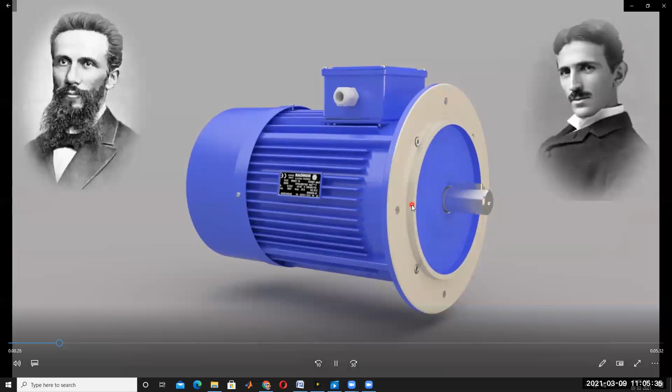So, induction motor. Generally, you can say that this is an induction motor. In this induction motor there are different types of parts. The induction motor concept was developed by Nikola Tesla and Galileo Ferraris. These are the different concepts we are getting from these two scientists.

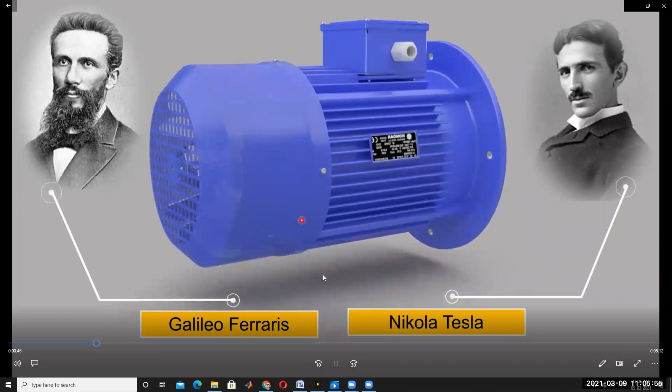Induction motor concepts, the working principle, were invented by the scientists Nikola Tesla and Galileo Ferraris. Because of this invention, nowadays we are enjoying these motors: single phase induction motors, fans, escalators and paper industries. Different types of applications are there.

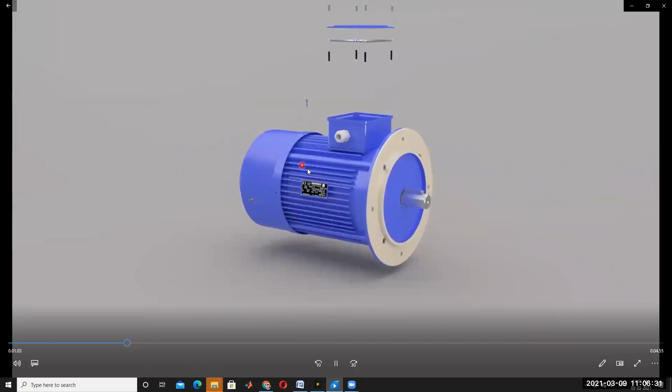This induction motor has different types of parts. This is called a terminal box. Six terminals are coming from this box. The outside is called the stator frame, the frame of the induction motor. The terminal box is placed on the stator frame of this induction motor, and this is called the cooling fan.

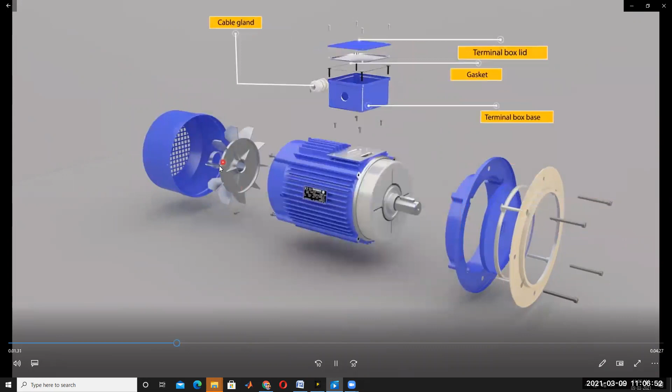So what is the purpose of this fan? It's used to cool this motor. When the motor is operating for a long time, the current increases, and compulsorily some losses are there. Those losses are dissipated in the form of heat, and that can be cooled by using the cooling fan.

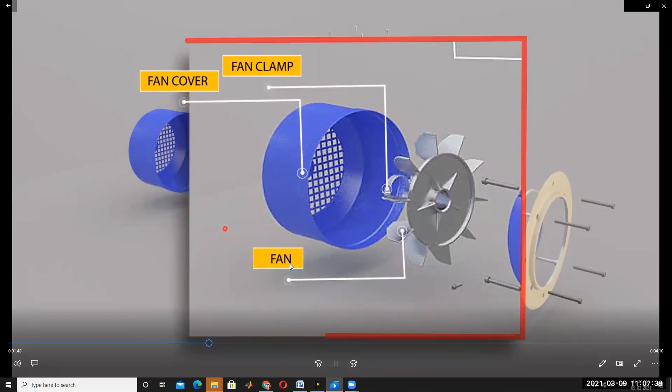And this is called the fan cover and fan clamp. This is the fan. It is placed on one side of the induction motor, used for cooling the induction motor. This is also one of the important equipment in the induction motor. And this is called the flange.

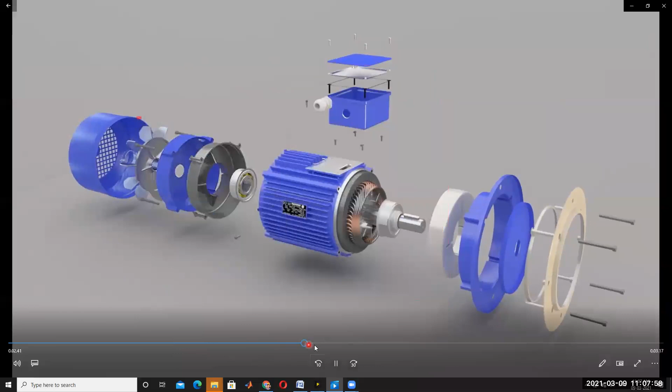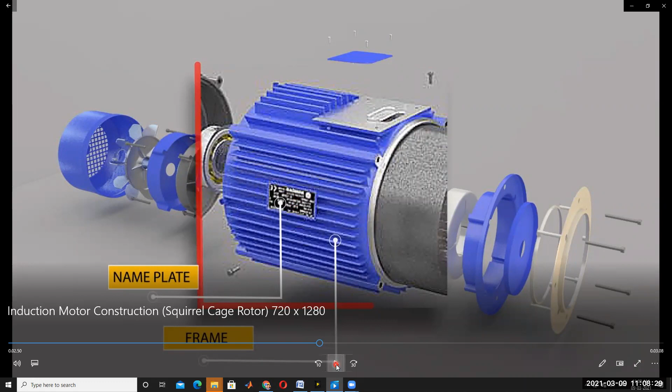This is the nameplate of the induction motor, and this is called the frame. In the nameplate, each and every information is provided about this machine: the operating voltage, the current range, the voltage range, and the operating frequency. Everything is provided in the nameplate of this induction motor.

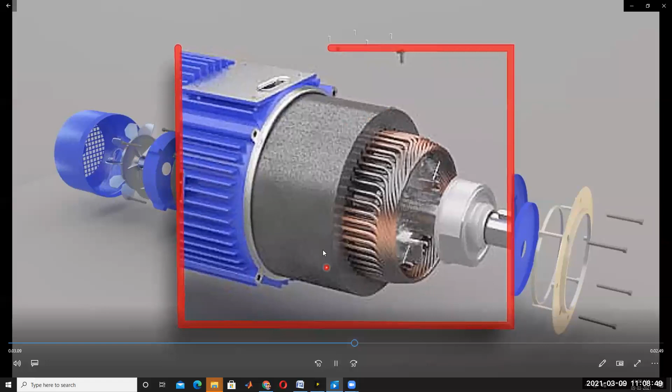This is called the stator core of the induction motor. In this stator core, the winding is placed inside the slots. There are different slots, and inside the slots the winding is placed and distributed. So this is the outer frame and the stator core. I have already explained this concept, the stator core design.

In this stator core there are different slots. In each slot, the winding is placed, inside the slots of the induction motor. Here is the slot. The winding is distributed as the stator winding, and the winding is connected to a 3-phase AC supply from the box.

This has no rotating part. This is called the stationary part; there is no rotating part. Inside here we have to place the rotor, based on the induction principle, same as a transformer. The rotor winding is placed inside of this.

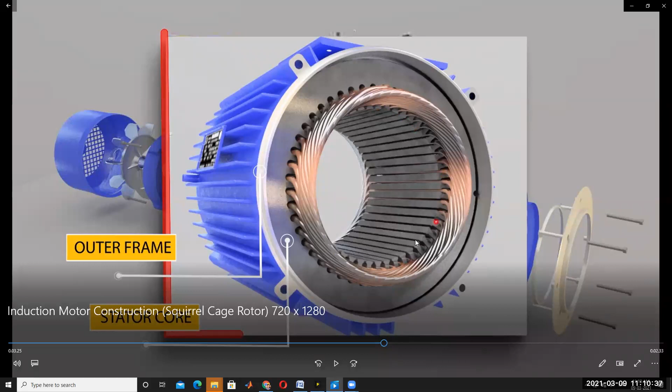Okay, this is inside of the stator core. The rotor, we have to place the rotor here. So there is no connection between stator and rotor. There is a small air gap, so we have to maintain the small air gap in between these two, rotor and stator.

Next, the thickness of this stator core sheet is 0.3 to 0.5 mm, just like a transformer. So the stator core is not designed using a single solid material. It is not a solid type material. It is different sheets placed together, and in between these, we have to use some insulation. So insulations are provided, and the thickness of each sheet is 0.3 to 0.5 mm.

By placing all these sheets together, you form the core. The main purpose of doing this is to reduce the eddy current loss, same as a transformer. So 90% similarities are there between the transformer and induction machine. The only difference is that in a transformer the secondary winding is stationary, but in an induction machine the secondary winding is rotating. That is called the rotor.

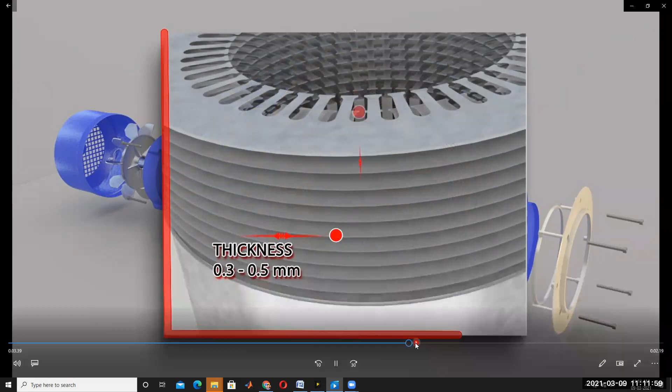And then the stator slots. This is called stator slots, and this is called stator teeth. So this is called stator tooth, and this is called stator slots. Understood.

And stator winding, this is called stator winding. The three-phase winding is distributed equally for three phases: R phase, Y phase, and B phase. Some of the portion is covered by R phase, some by Y phase, and some by B phase. Three phases are distributed equally in the stator core. This is called stator winding. This is a three-phase induction motor.

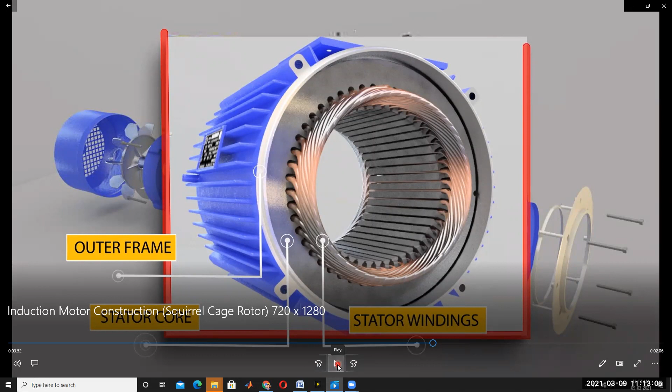That's why some of the winding is connected to the R phase, some to the Y phase, and some to the B phase, and all are connected together at one particular place. That is called star connection. And when one terminal's start is connected to another terminal's end, that is called delta connection. Based on the connection, we can say star or delta. This is the stator construction.

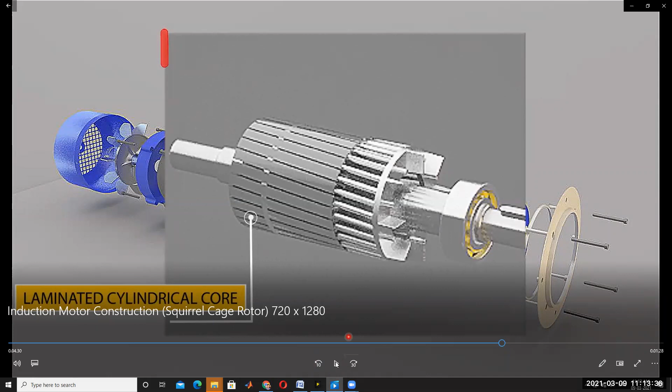So this is called the rotor. The rotor also has a laminated cylindrical core. This is called the laminated cylindrical core. This is called the shaft. This is called end rings. These are connected end rings. This is called the laminated core.

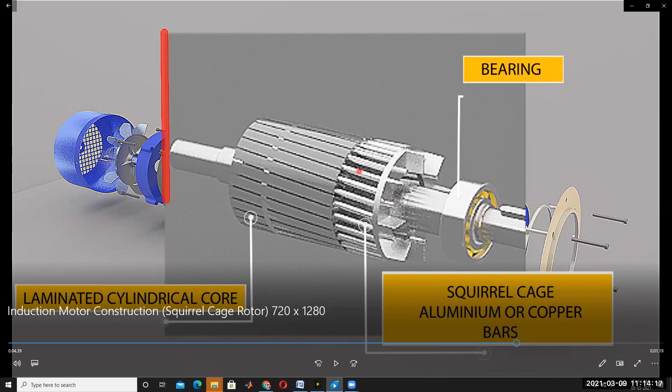So these are called squirrel cage aluminum or copper bars. I already explained this in the previous animation. These are not parallel to the shaft. That's why it is called a squirrel cage induction motor. The copper rods are not exactly parallel to the shaft. There is some angle between the shaft and these copper rods.

So this is called bearings. Inside, we have to place bearings. And next, actually these rotor bars are at a slight angle; that is called skewing. So rotor bars are slightly skewed. This is called end rings, I already explained. This is how the end rings are connected.

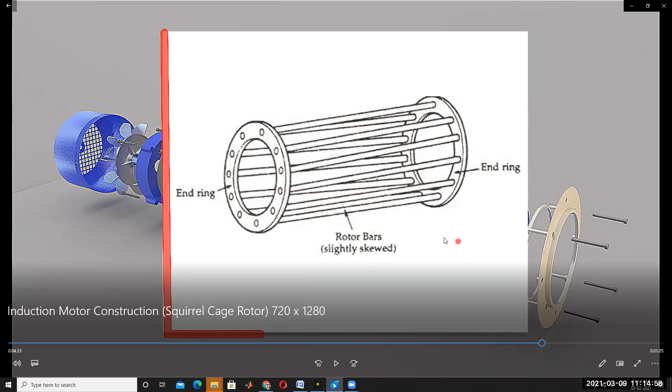So rotor bars, this is called rotor bars, the copper rods. They are not exactly parallel to the shaft. That's why it's called a squirrel cage induction motor; it looks like a squirrel cage. Understood? It reduces the humming. So why?

So why are these bars not exactly parallel to the shaft? If you are placing them at some angle to the shaft, this is the reason: it reduces the humming and provides smooth and noise-free operation.

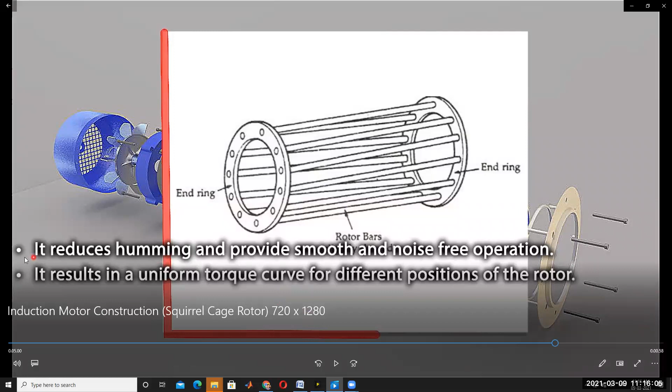Generally in the induction motor we'll get some humming noise, and also in the transformer. In the transformer we get the humming noise because of the magnetostriction phenomenon. Because of magnetostriction, we get a humming or buzzing sound in the transformer. I've already explained that. So here also we'll get some noise. It reduces the humming and provides smooth and noise-free operation.

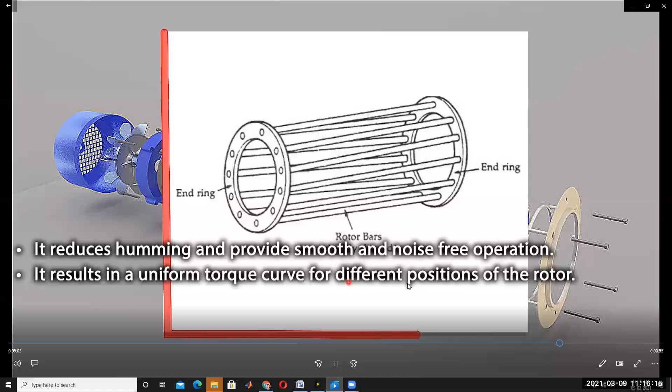It results in a uniform torque curve for different positions of the rotor, and the locking tendency of the rotor is reduced. If the stator and the rotor bars are exactly parallel, there is a locking tendency between the stator and rotor. That means the rotor is not free to rotate at starting; there may be locking between the stator and rotor at the time of starting. So that's why, to reduce the locking tendency, the locking tendency of the rotor is reduced.

So the rotor conductors or copper bars are placed in this manner, at some angle, as the teeth of the rotor and the stator attract each other and lock. That's why they're not placed exactly parallel to the shaft. The stator slots are exactly parallel to the shaft, but in the rotor they're at some angle. If we maintain them parallel, the teeth of the rotor and the stator may attract and lock each other. So to avoid that locking tendency, the rotor bars are placed at some angle, not exactly parallel.

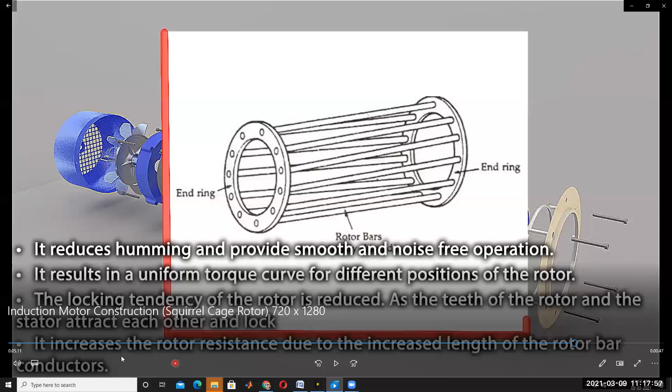And it increases the rotor resistance due to the increase in length of the rotor bar and the conductor. You can easily understand this in later classes. So this is about rotor bars.

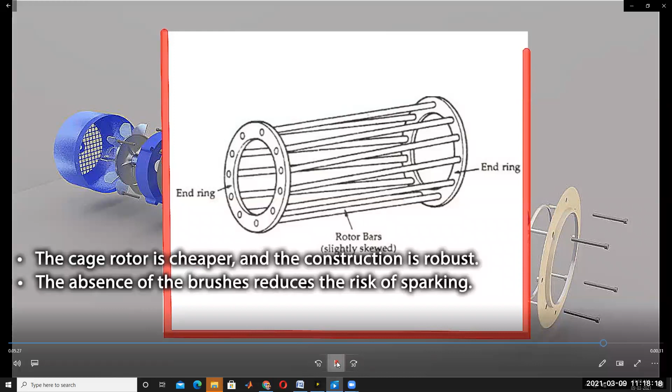The cage rotor, the squirrel cage induction motor, is cheaper, as I already explained at the start. The cage rotor is cheaper and its construction is robust. The absence of brushes reduces the risk of sparks. In the squirrel cage induction motor, brushes are not used. Based on the induction principle, power is transferred from stator to rotor. Brushes are not required.

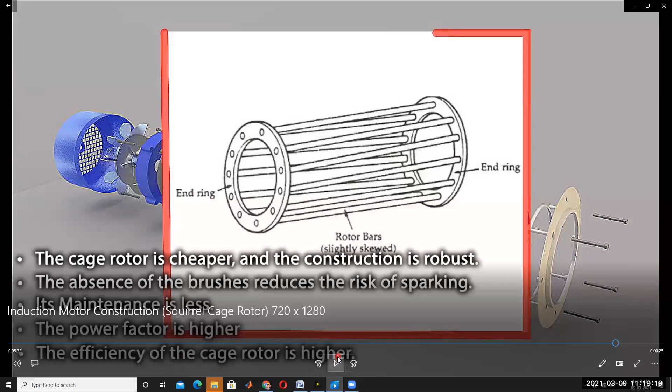Based on induction, we give the power supply to the stator only, not the rotor. That's why brushes are not required in a squirrel cage induction motor, but in a slip ring induction motor they are required. It is maintenance-less and the power factor is higher. The operating power factor of the induction motor is higher when it is designed for squirrel cage. The efficiency of the cage rotor is higher compared to the slip ring induction motor. So this is the complete information about induction motor construction.